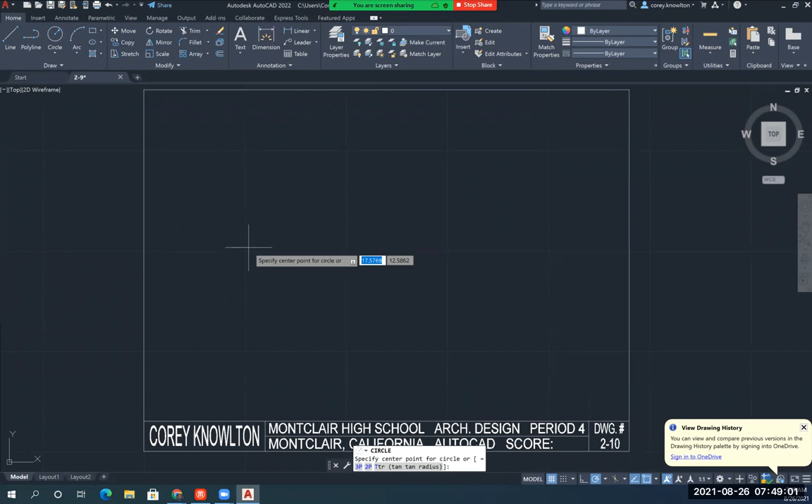So I'm going to get center radius, and start it over on this side somewhere. It's a 1.25, enter. Now I got to make sure that I have center and quadrant turned on. Quadrant is going to be important, and center is going to be important also.

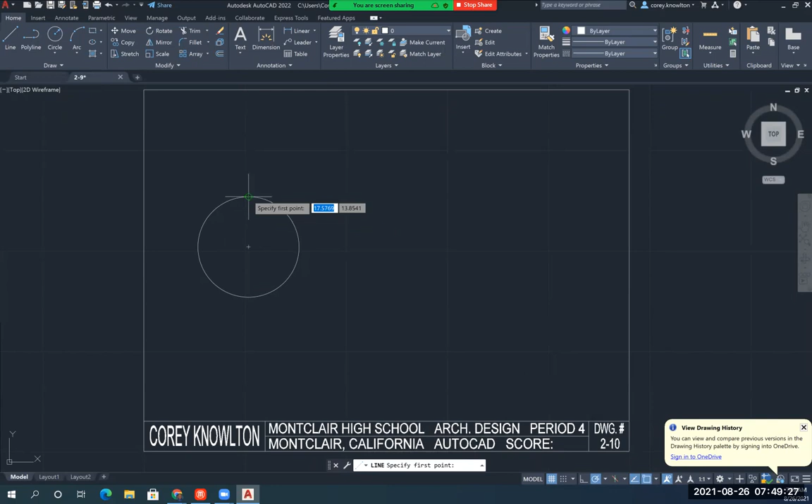The assignment shows that there is a 0.5-inch line on the top of this circle. So I'm going to start here at the top quadrant, point my mouse straight up, type 0.5, enter. But then it also shows me that there's a 45-degree line going up this direction, but it doesn't tell me exactly how far to go up at that angle.

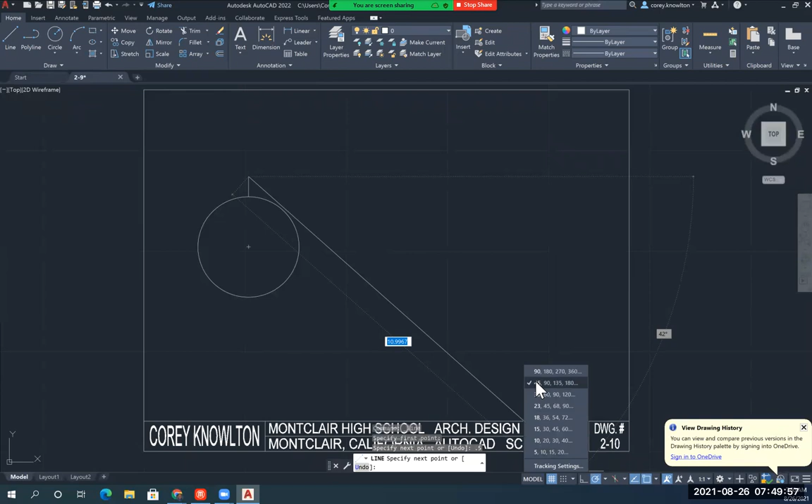So what I'm going to do is go to my polar tracking here, click on the little angle thing next to it, and make sure that 45 is selected. Then I'm going to come up here and draw a 45-degree line, but I'll make sure I draw it much longer than I need it.

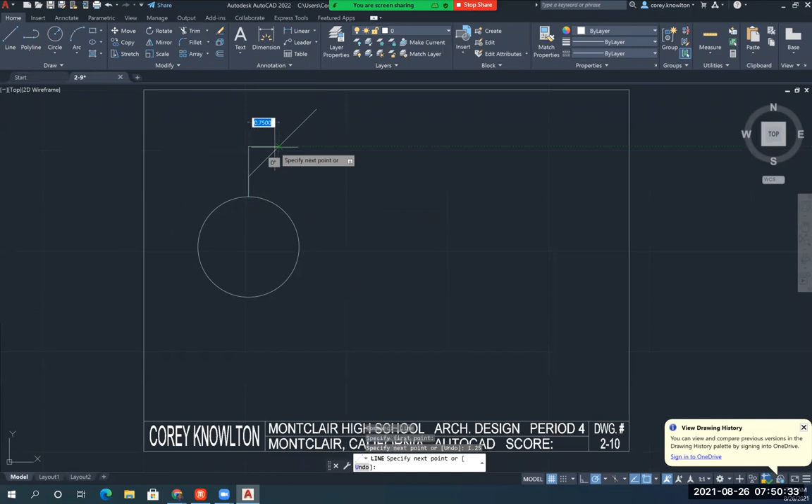Then it shows me that there is a measurement from the top of the circle here to the top of my piece, which is 1.25. So I'm going to draw a reference line from back on the top, right over my 0.5 line. I'm going to go straight up 1.25, enter, and then straight across to my 45-degree line, so I know where to trim it.

So now I'm going to go trim and trim that off. Actually, I can go in and delete these two reference lines, and I'm left with the size of the 45-degree line that I need.

Now, to come across the top here, the measurement doesn't show it on the top of the assignment. It shows it at the very bottom, that the line here is 2.25. So I'm going to come from here, point my mouse this way, type in 2.25, enter.

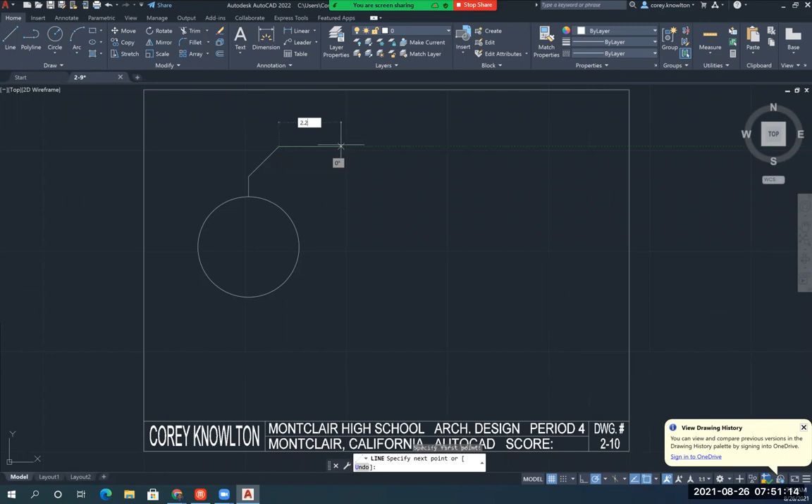My top, and I have to come straight down from here. I don't know how far at this point, so I'm just going to draw a line down. Doesn't matter how long, just draw it down, and we'll come back to finish this up later.

Now I'm going to work on the handle, and it shows that from the center of this circle over to the center of the first circle in the handle up on the top, it gives a measurement of 4 inches.

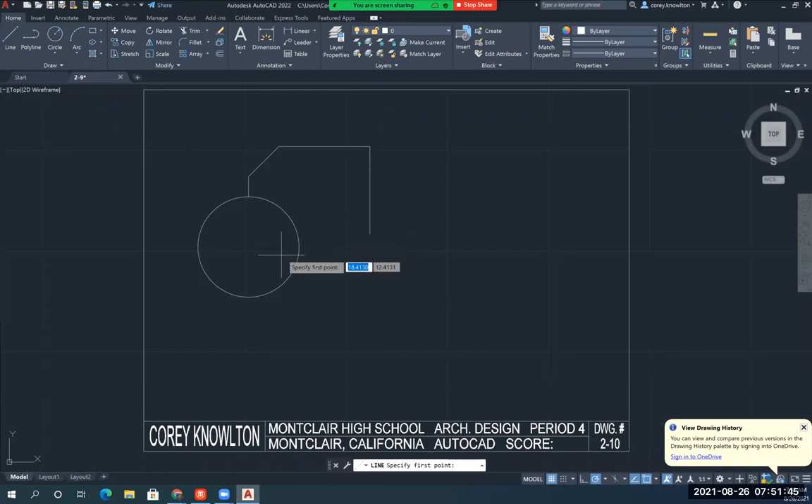So I'm going to draw a reference line from the center of my circle here, going this direction, 4, enter, enter. And that's going to be the center of that small circle slot that's in the handle of this wrench-looking thing. It shows that the size of that radius is 0.5.

So I'm going to get a center radius circle, started at the end point here, 0.5, enter. Then it shows that the end of the handle is 3 inches from the center here. So I'm going to draw another line from the center here, this way, 3, enter, enter.

And that's where my center point is going to be. I can either copy this circle over, or draw another circle. I'm just going to copy this circle, enter. I'll grab it right at the center point, and drop it right on the end point.

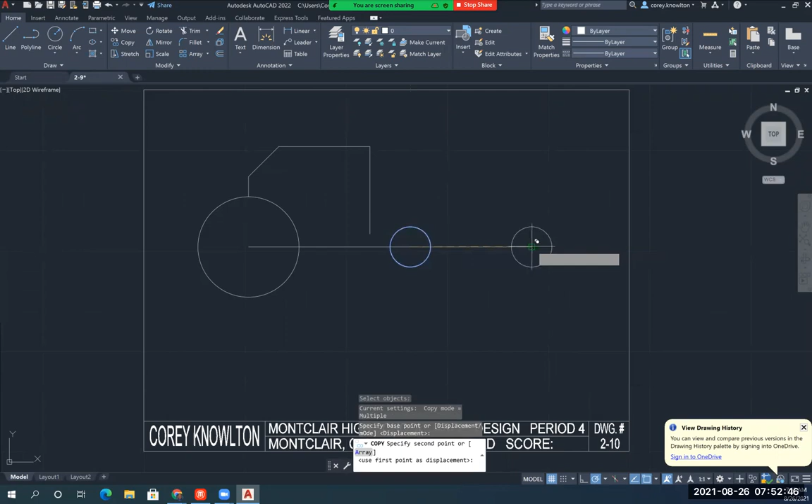I picked it up at the center, dropped it off on this side. The end of the handle here shares the same center point, and it's a radius of 1. So when you go center radius, start it right at the center here, and it's a 1, enter.

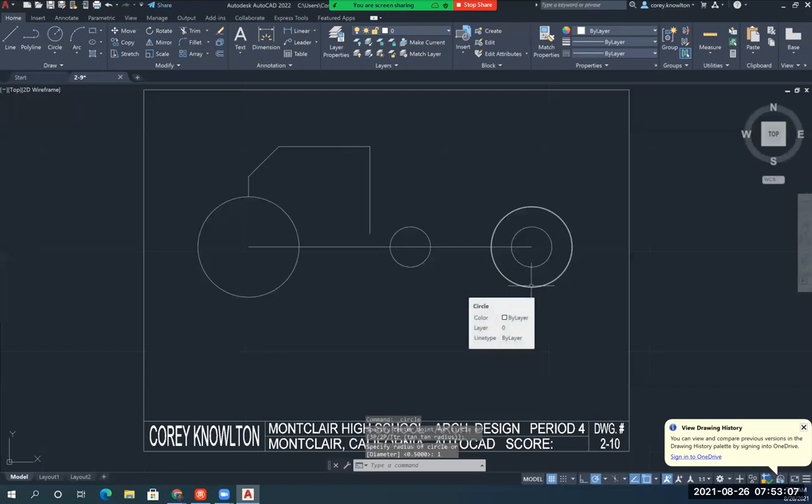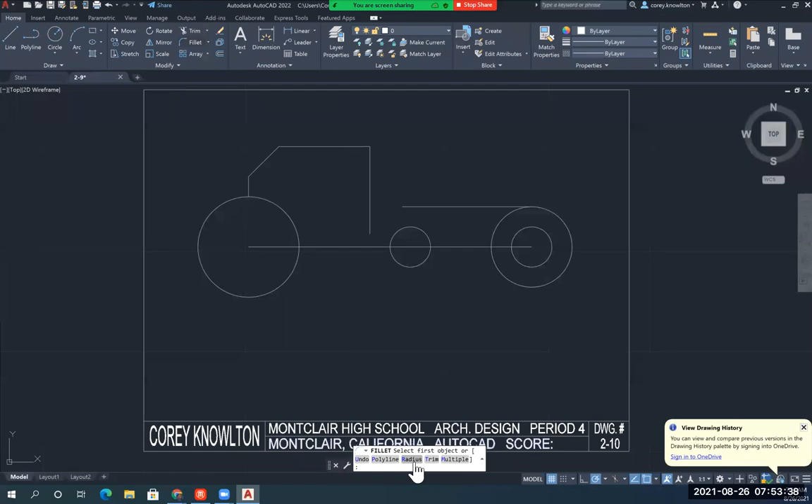So I'm going to go up to my fillet command, click on fillet, go down to the bottom command line, click on radius, 0.75, enter. Click on this line, click on this line, and it rounds it off for me.

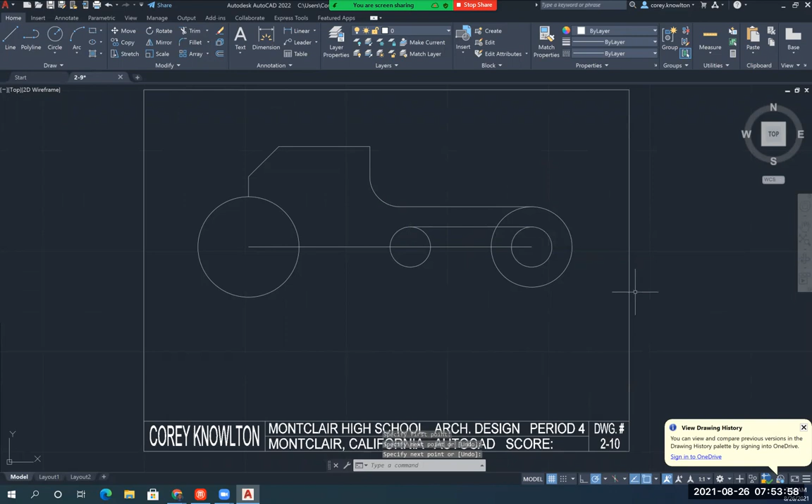I'm also going to put in the top of the slot from the top quadrant here to the top quadrant there. I'm just going to draw a line in. And now the entire bottom is exactly like the entire top.

So I'm just going to mirror these two lines, all of the top edge and the top of the slot. Once I select them all, I can enter. And I'm going to use this middle line from here to here as my mirror line.

Do I want to delete this? No. Now I just have to trim. Trim, get rid of this.

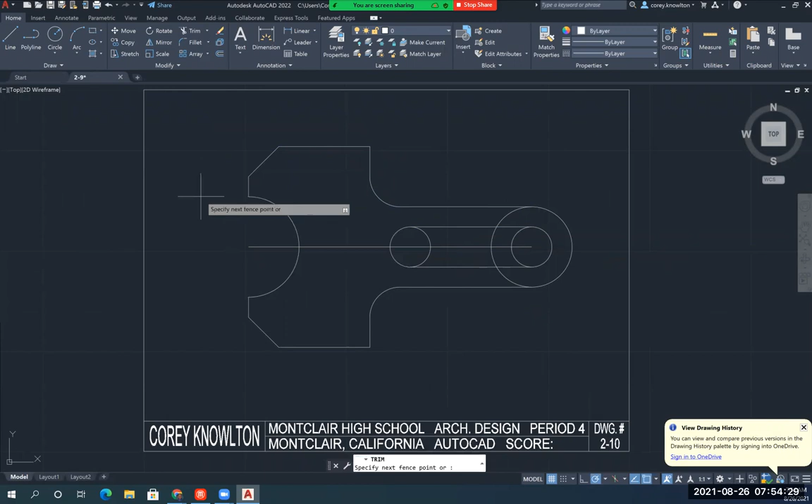And I can just move these. And I put in my center line. So I'm going to go back to the annotate, back to center.

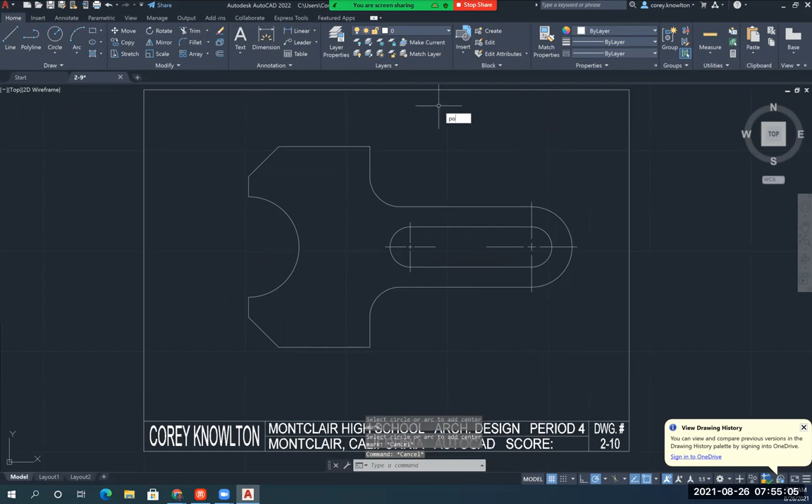It does show a little plus sign here, so I better go in and type in point. Enter. Now it gave me just a little dot, so I need to format my point style.

All right, and that is drawing 2-10.